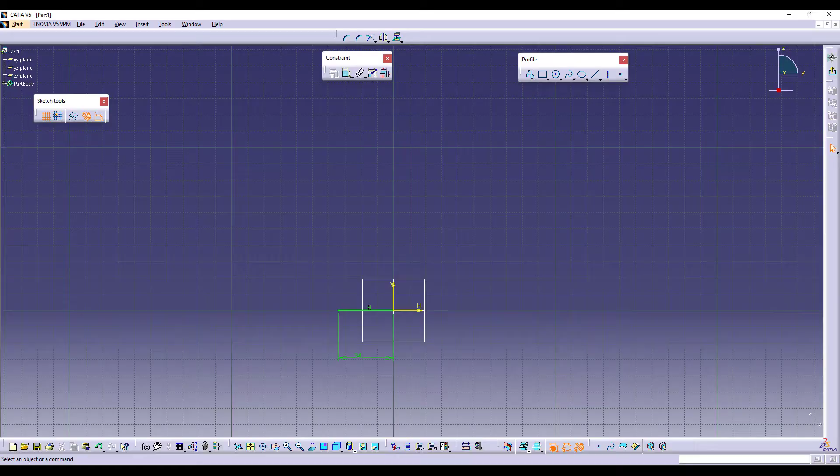As you can see, this is the first sketch, which is of 34. I'd like to make the sketch first and then start adding the material, which is an easier way of doing the clamp. So I'll take this as 34. Now I have a line as well, which is up to 25. And then goes this way and then goes that way. Now this is supposed to be 25.

This distance is 33, which is exactly from the center. I am understanding that this is the center for the axis. As you can see, I am taking this as my sketch because the dimensions are provided with respect to the centers. So I'd like to take this as 33. The overall height is 69. So let us maintain the 69 as well. You can do it directly or you can do it with me simultaneously.

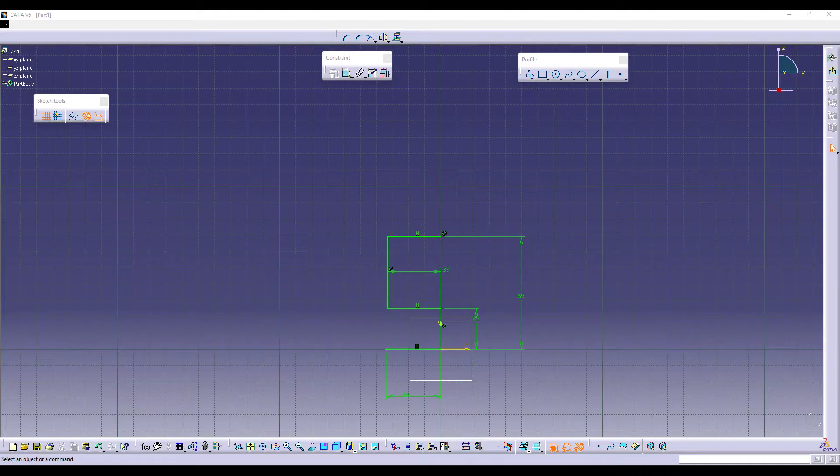Now again there is a straight line up to 44 and then another line. So let me take the straight line to 44 and then another line. The thicknesses for everything will be added according to the initial sketch. So this is supposed to be 84. No. This is a straight line at 84 as well and then goes up. This line is supposed to be 60.

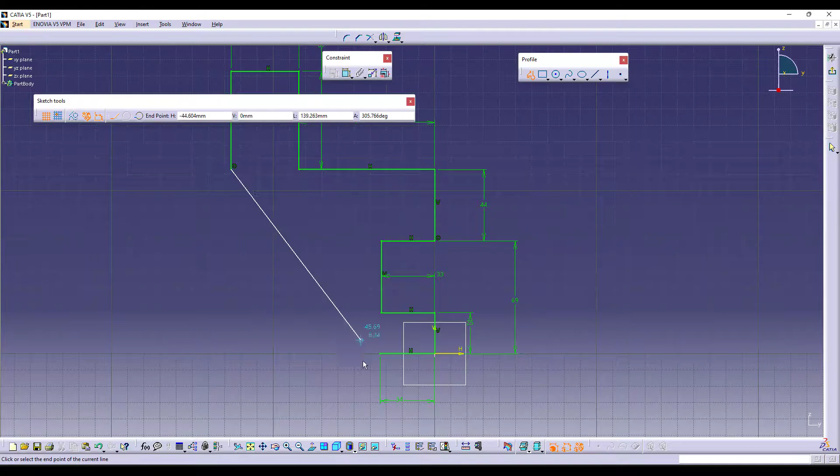The length is already given, so I am taking that as 60 and next is 42. So I'd like to take this particular line to 42 and then go back. This line and the 60 are the same as I've shown in the drawing, so hence I've coincided this with respect to this line. So let me give this distance, which is supposed to be 42, and then the slant line joins with the end part of your feature. This is your actual sketch.

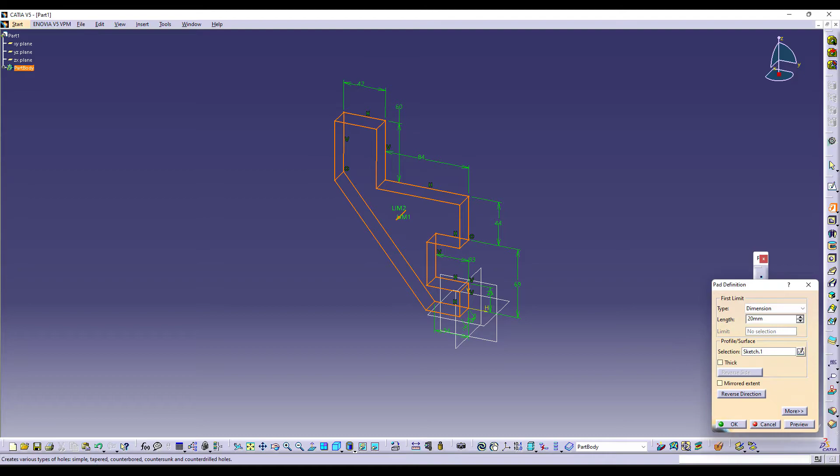Since we know that the thickness of the body is 6 typical, that is the whole body has a thickness of 6 only, let's take that as 6 first. Now let me use pad and do it. I'd like to do it symmetrically, which is mirrored extent on both the sides, because all my features depend on the center, the axes, as I've already mentioned. So I use mirrored extent. Since it's 6, I'll give it 3, so it adds material equally on both the sides.

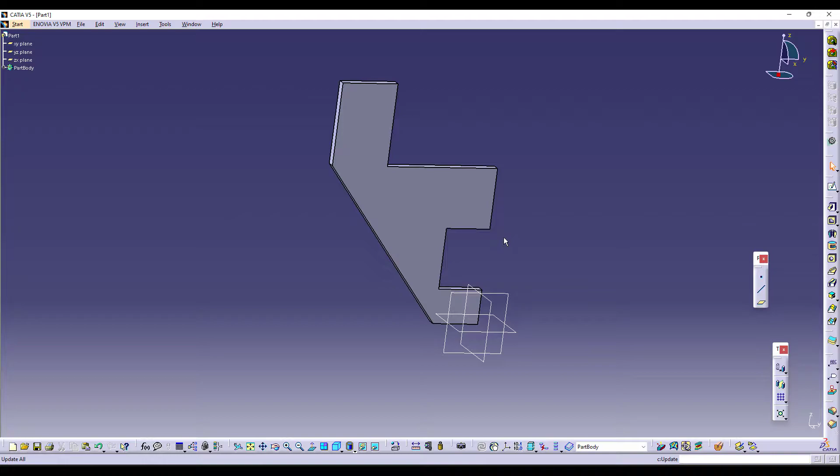Now, before proceeding to add the eye shape, let us start giving the rounds, because the rounds should be reflected to the external body as well. So let me take the rounds. This is supposed to be 27, which is the first round, and this is supposed to be 22, which is the next one.

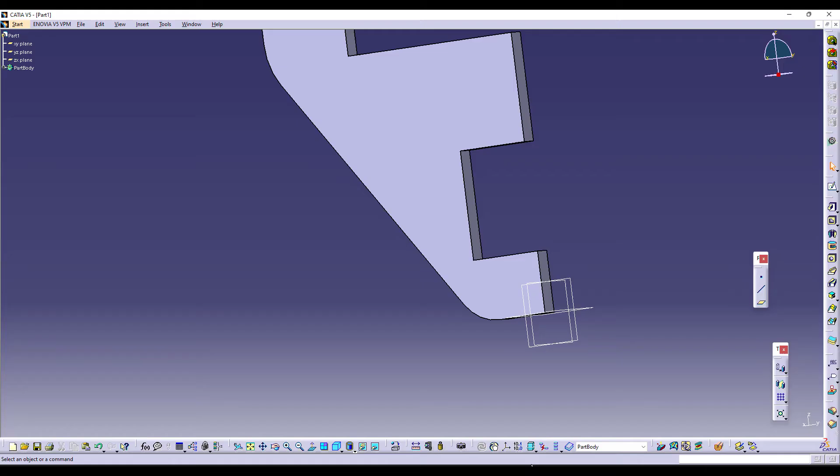And there are 3 more rounds. Let me give those as well, which is 13 and 12. So I'd like to give 13 first on this edge and on this edge, and then 12 to this particular edge. Then let me get back to the isometric view.

Now, the addition of material, as you can see, is non-uniform. This particular portion is actually up to 30, whereas this end portion is up to only 20. So let me do one after the other, and I'd like to use the front plane again because I want to do the addition symmetrically on either side. And I want to add this sketch, so I'll be using project. If you don't convert project into construction mode, it will understand that it's a sketch. So you can directly make that sketch and create an addition of material.

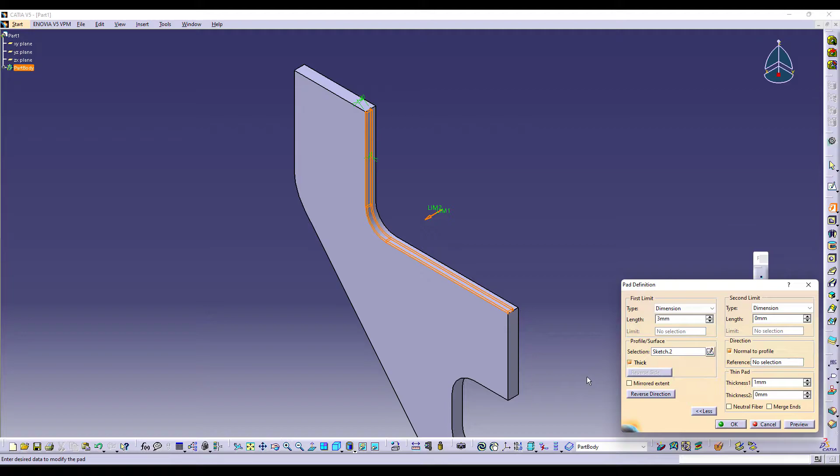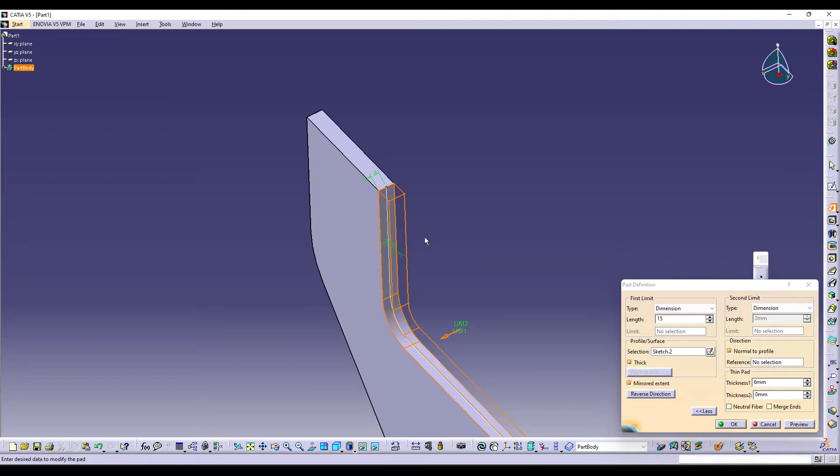Now you understand that since the sketch is open, it prompted us the error, so you can give thickness as well. The amount of thickness, as I have already mentioned, is supposed to be 6. So let us see if the thickness is adding on to the outer side or towards the inner side. As per the sketch, the addition should be on the outer side, so what we are doing is the right direction. We have to do it mirrored extent, and the overall addition is 30, that is 15. Whenever there is a mirrored extent in CATIA, you're supposed to give half of the length. It automatically doubles it.

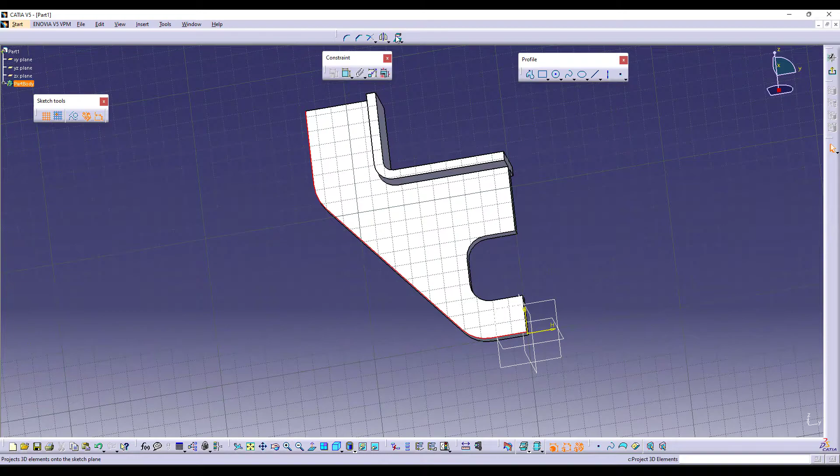Now, let's add to the rest. Again, I'm trying to use the front plane because I want to give mirrored extent, and then I'd like to use the whole sketch. This edge as well. Now, let me project that. As you can see, it converts itself into a sketch once you exit. You can create a pad. As usual, since it's open, it shows you an error.

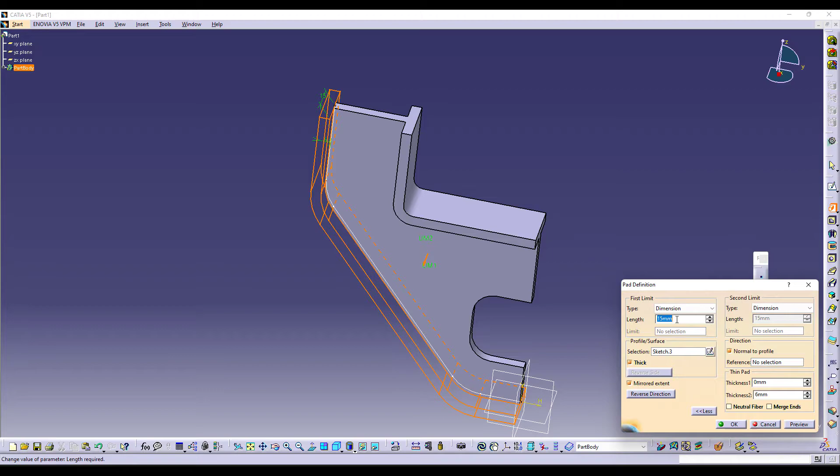Let us try to give thickness to it. The thickness should be added onto the other side. It should be added onto this side. So let's make sure that is happening. If it's not, you can again give the thickness over here. Give it onto the other side and say it's supposed to be 6. Now it's supposed to be mirrored extent, but only up to 20, that is 10. It does it equally onto the other sides up to 10.

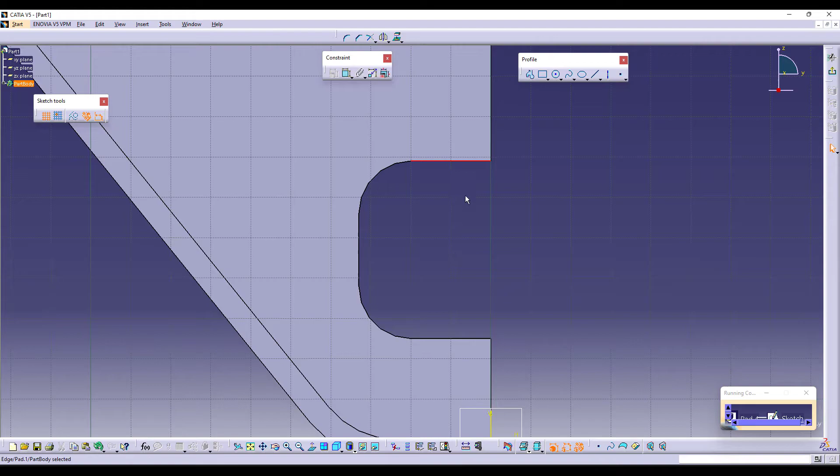Now the same is added to this, which is 20 TYP. So again, I'd like to take the same plane. The reason again I'm trying to take is because I want to do mirrored extent. In case you have missed previously, I'm trying to repeat it again. This is the center. Again, it will show you the error. You have to convert that into a solid.

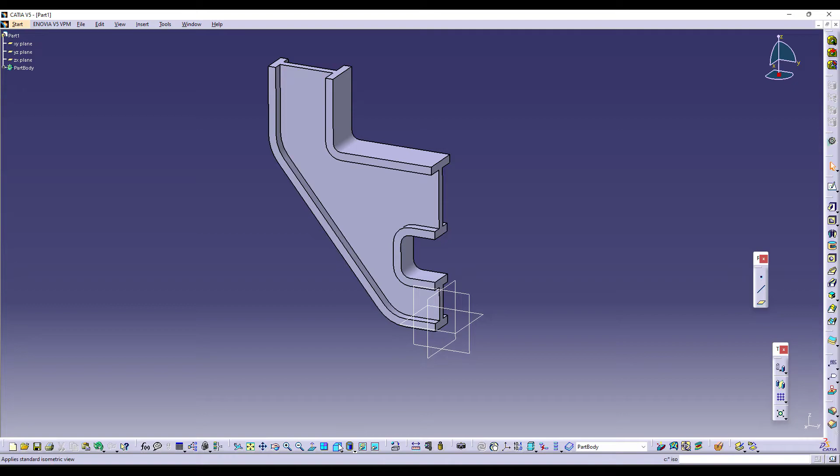Now make sure that the thickness is towards the inner side. So this is supposed to be 6 and this is supposed to be 0. And the dimension is 10, which is perfect onto both the sides. Once I say OK, it tends to create this way. Now when you add material, usually the body becomes 1. So you can follow that process as well.

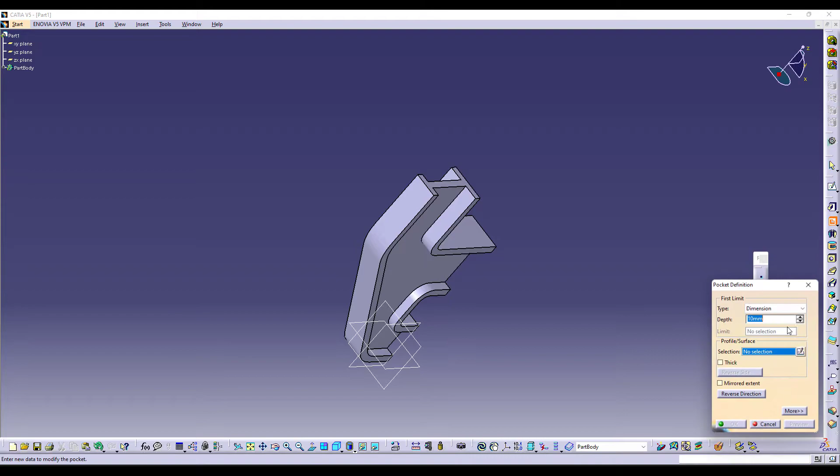Now let us add these circles. Usually to add these circles, we need to remove the material first. So I'd remove the material and then try to add it. The overall dimension for this is dia 34. So I'll use this face. And now try to remove the material. We know where the differences are. Let me take it here, and the diameter is given as 34. This is supposed to be exactly at the center. So let me try to coincide it on the center.

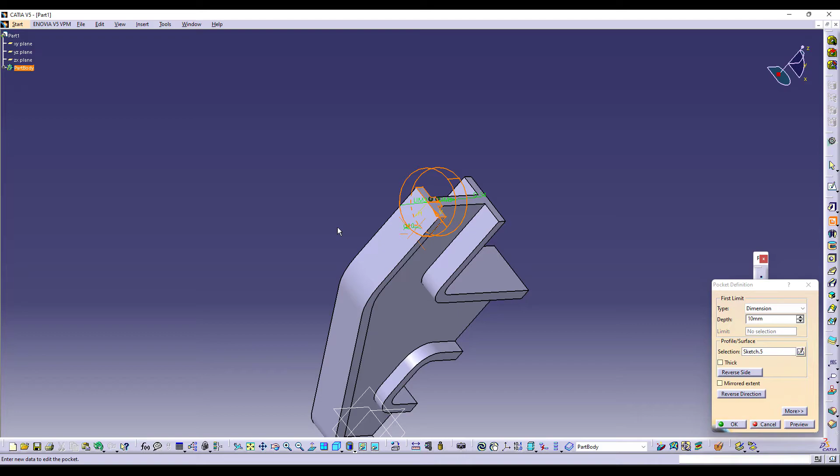Now exit. We need to cut this material till the immediate next surface, so I'd like to cut it. Now again I can add the material. Here we cannot add the material inside the body. A body inside a body cannot be done as per feature based modeling. Hence we do it this way. In CATIA usually it becomes one single body by using a union command. If you want, you can try that as well.

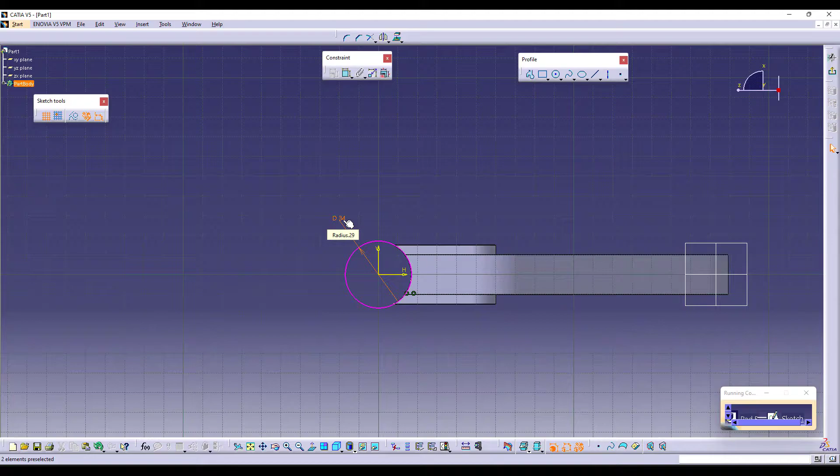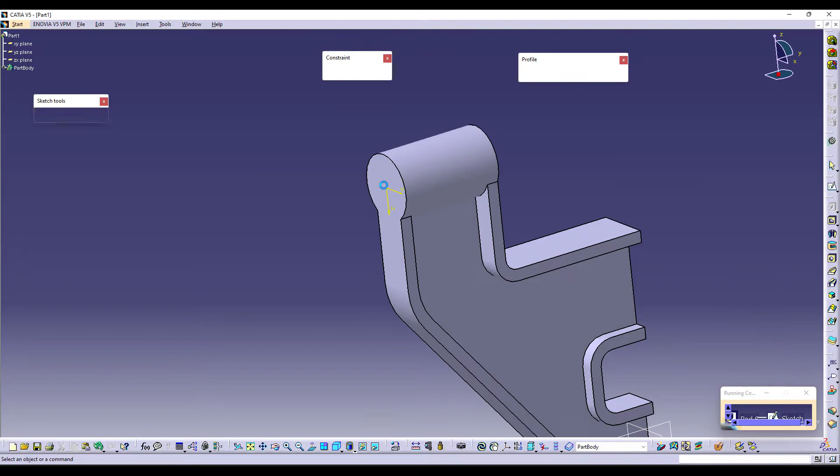Now since I am using that as the reference, the diameter is the same. So let me try to add the material till where I want to and then say okay, this is the addition of material. Now there are 2 more circles, which are of 8 TYP and 42 dia. So let's try to take that as well onto the same body using the same axis. I'd like to use the same axis. So I'm trying to keep this,

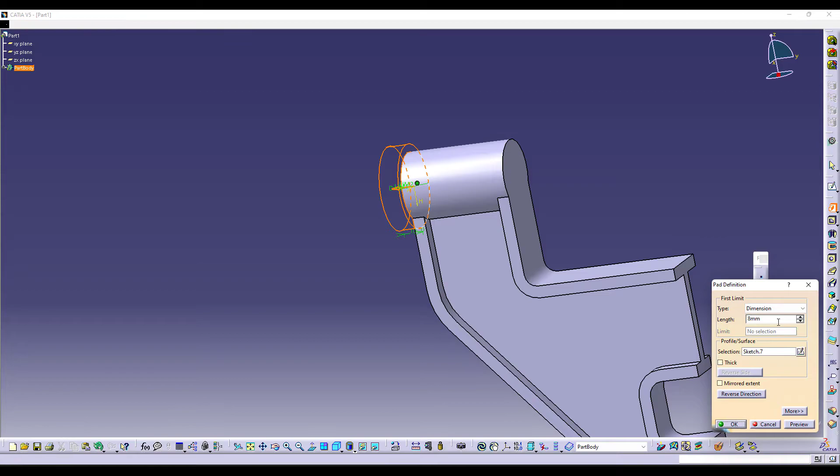and he said 42. So I'd like to take this as 42 and then maintain concentricity. It's an easier way of doing it. Whichever you're comfortable with, you can use. And then add that material. Since we already know it is supposed to be 8 typical, I'll add it that way. Now the same thing should be done on this side as well.

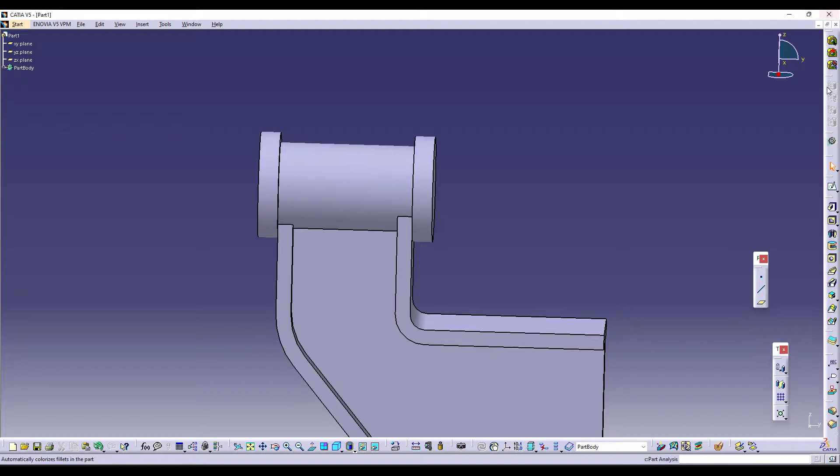You can take a plane in the center and mirror, or you can do like how I am doing right now. You can just select the complete edge and then add the material using your project command. It works the same. Now they are dependent on each other. So if I change this dimension, even this circle auto updates itself. Okay, now let's see how the bodies unite and become one by directly adding the material onto the body.

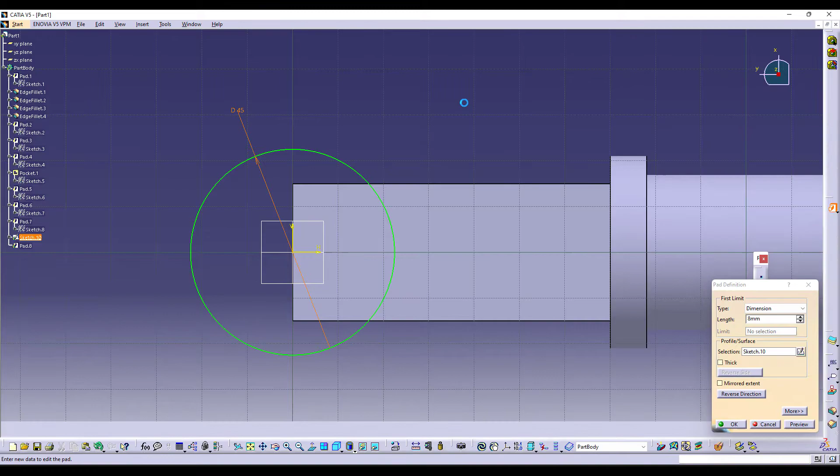So I know the dimension for this center is supposed to be 45, which we have already seen here. So let me try to take that and exit. Now when I add the material, I need to add it till this extent. One direction is actually till 1. They have mentioned that in the drawing. As you can see, a small 1 is here. And the other side is supposed to be up till the selected surface, till where I select it to be.

Once you do that, it converts itself into one single body. A body inside a body is usually not acceptable, but in CATIA it becomes one, or you can use a simple union command if you think it is not one single body. Now let us add the last one, which is of R10 from the bottom. I'd like to take this face as well and start making my sketch.

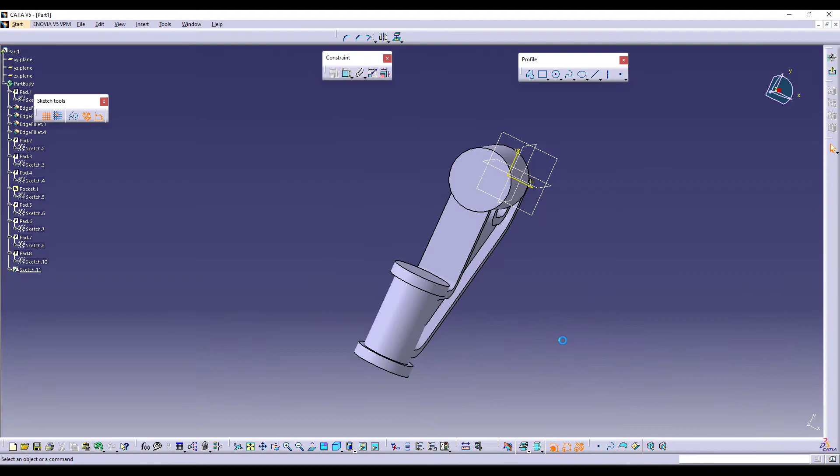It has the same center. It's supposed to be of radius 10. So I'd like to convert this to radius and give it as 10, then add the material. While adding the material, it should go up to the next surface, so I'd like to do it till here. As you can see, it does it.

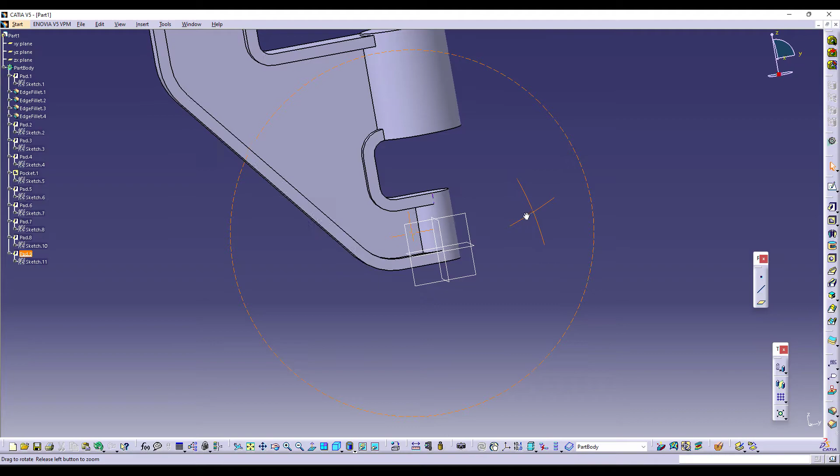This is how you add material. You can do both ways - you can either cut the material in air or you can do it this way as well. So let's continue with the model.

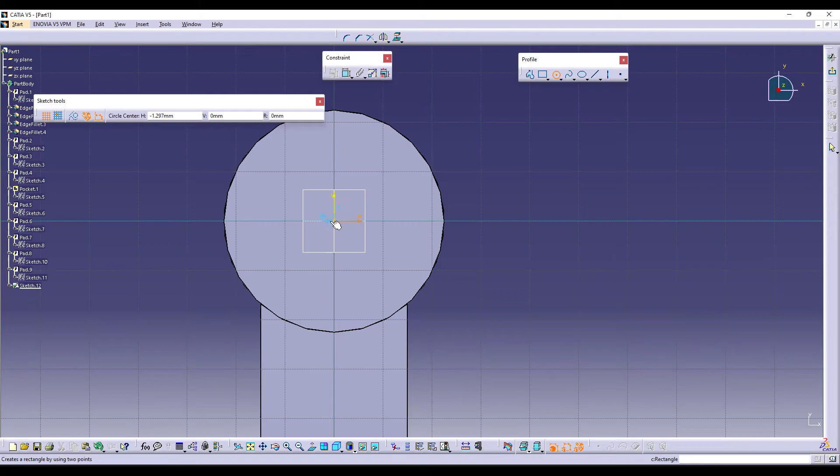There is an addition of material here which is a 54 dia, and since 8 typical is given, the thickness for that is 8 as well. So let me try to make that, considering this as 0,0 again. This is supposed to be 54. Now add to 8.

There is this feature which we are supposed to add, which is at a distance of 37 as well, and the height from this base is at 35. So let me try to take a plane first at 35 and then start making that feature. Into the other direction I want it to be at 35. On this plane I'd like to make a sketch.

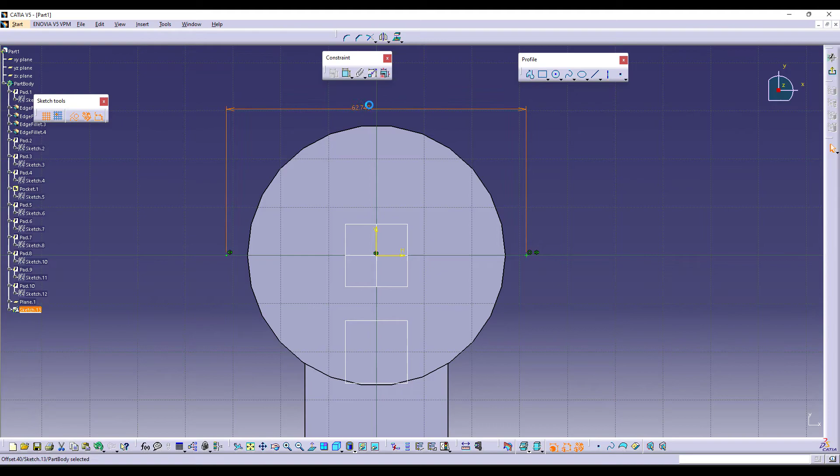Now the sketch is actually supposed to be of a point. I'll mirror it onto the other side and keep this in construction mode. Now the distance between these two is supposed to be 37. I want to maintain the 37 distance, hence I am trying to give it in this way. You can directly take 37, take a plane at 37 by 2 and also do it, but if you want to maintain proper dimensions, this is the way you can maintain the modeling.

Now I'm taking it parallel. I want it parallel through a point. I've selected my point and selecting the reference. You'll get the plane at that location.

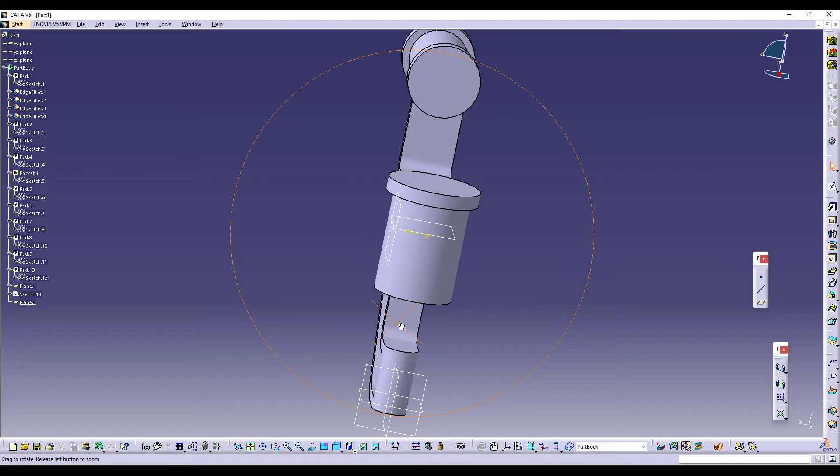Now on this plane, let us try to add whatever the sketch is given to us. This is my reference again, I can use this as my reference if I want. Now the sketch is actually at a distance of 28 and 10 radii.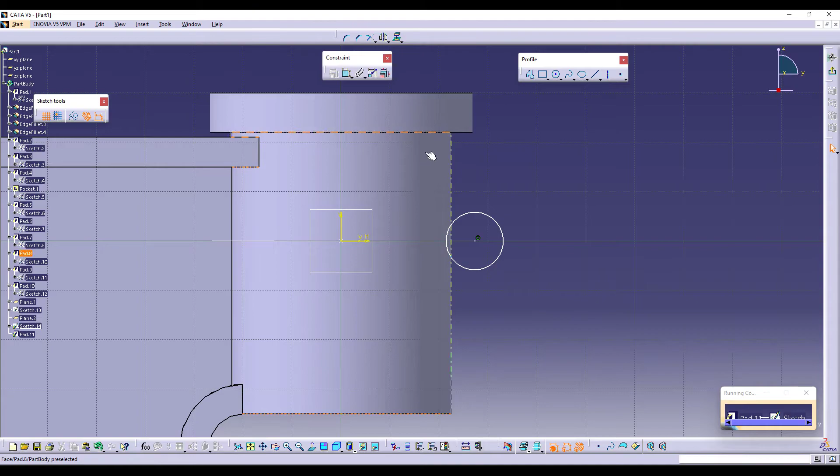So let me take that. This is a distance over here, this is supposed to be of 10 radii. And the distance is supposed to be 28. Now let us take the lines as well and then close it, and try to maintain tangencies as well.

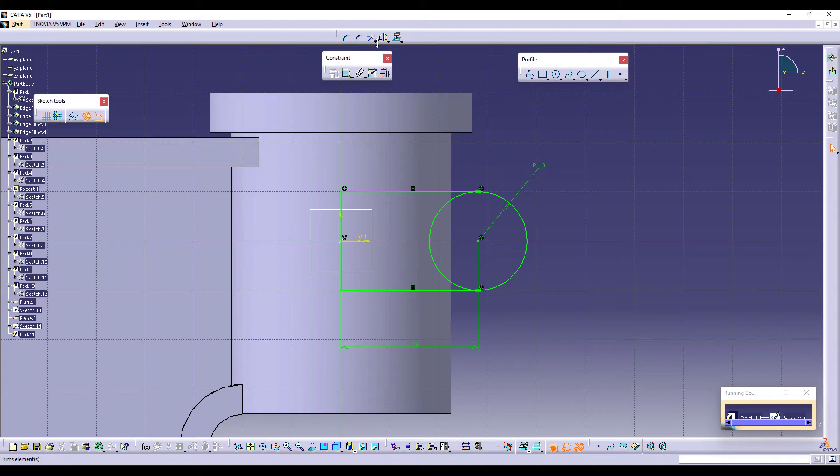And trim off whatever is not needed and add material. This particular body is actually added up to 16, onto the other side. You can mirror this feature.

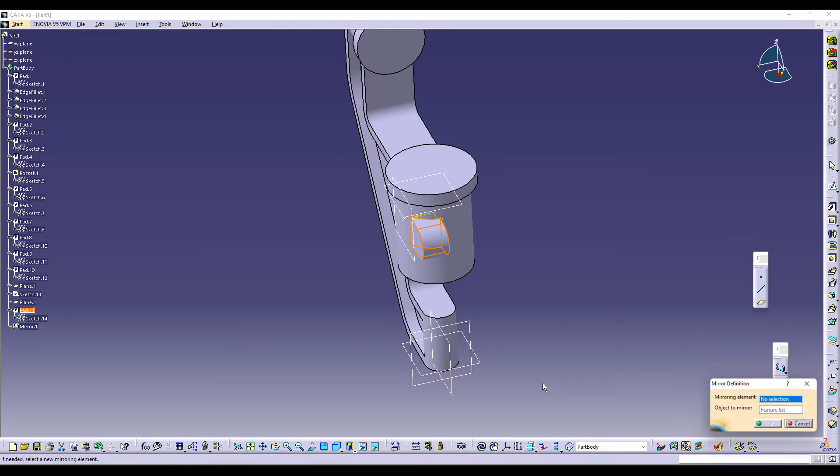Now, after the mirror, the final operations which are left to us are the rounds as well as our holes. So let us try to give them. I'd like to give this hole first, which is M10 through, using CATIA. I'm using a simple hole command, selecting the face, positioning it, and giving concentricity.

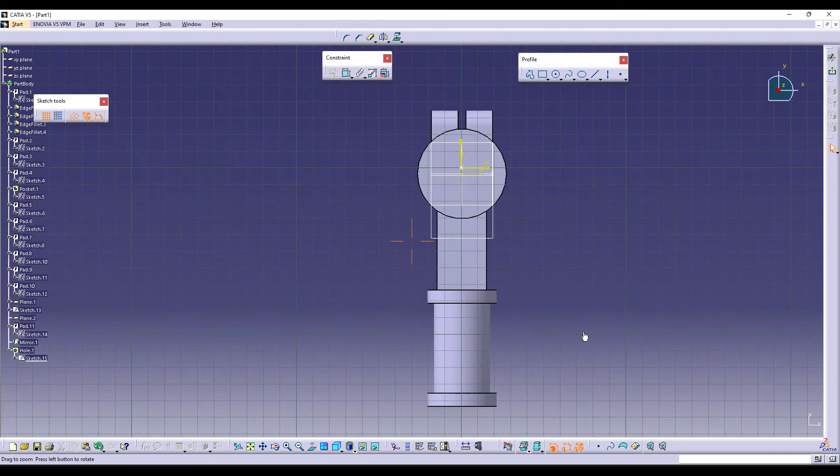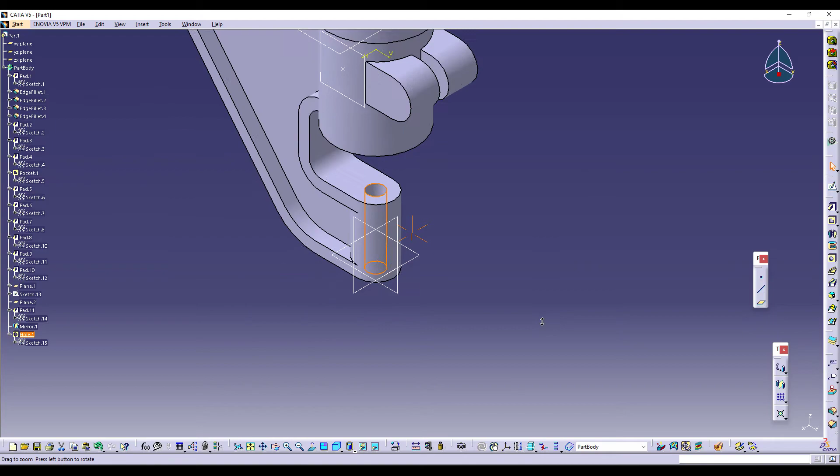Now let us try to change this - the first one. The 10 through is the second hole.

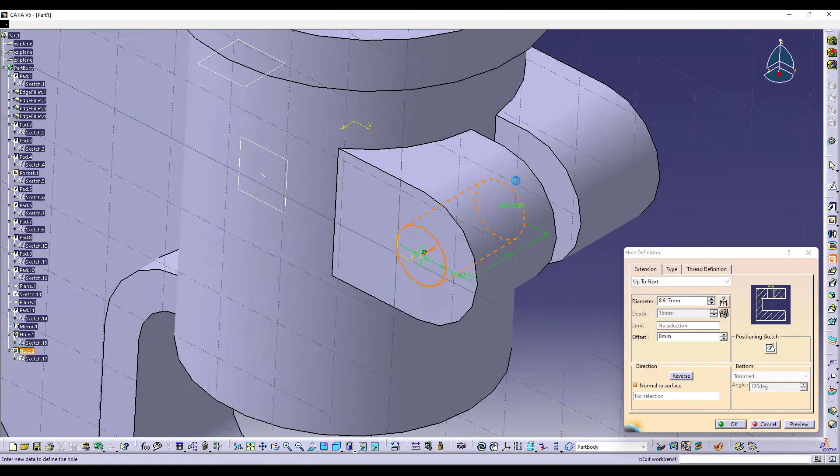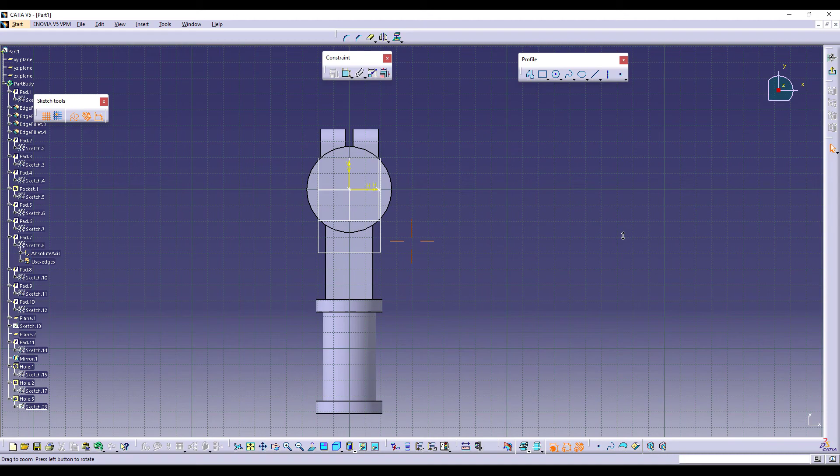Now the next hole is given at this location. Let's try to take that, which is 35 through. So I'd like to use the hole command again. This is supposed to be 35 up to the next, and I'd like to maintain concentricity. It's a very good practice to maintain concentricity.

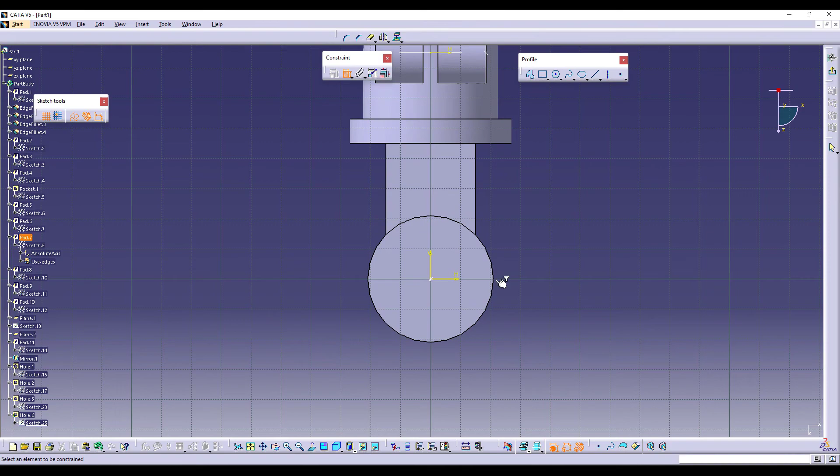Now there is another one as well over here, which is of 24. So let's try to give that as well. This is it.

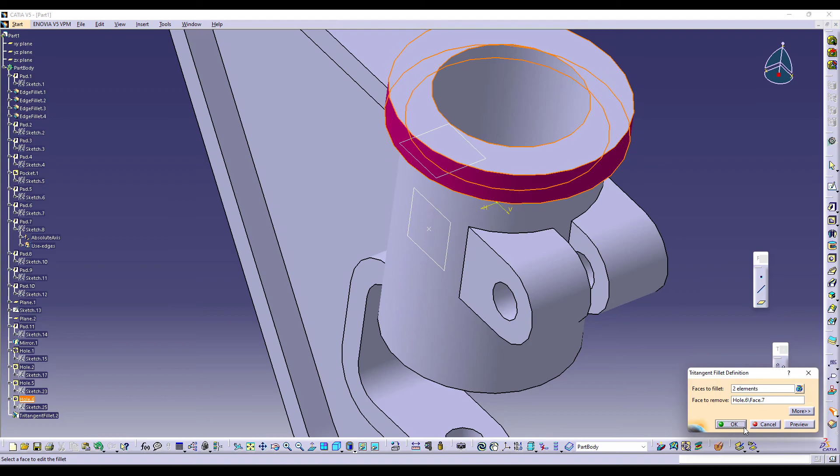Now there are few rounds, so let's try to give those. There is a tritangent round actually, in between this feature and the face. Let's try to create that round. As you can see, the same thing applies to these two sides as well.

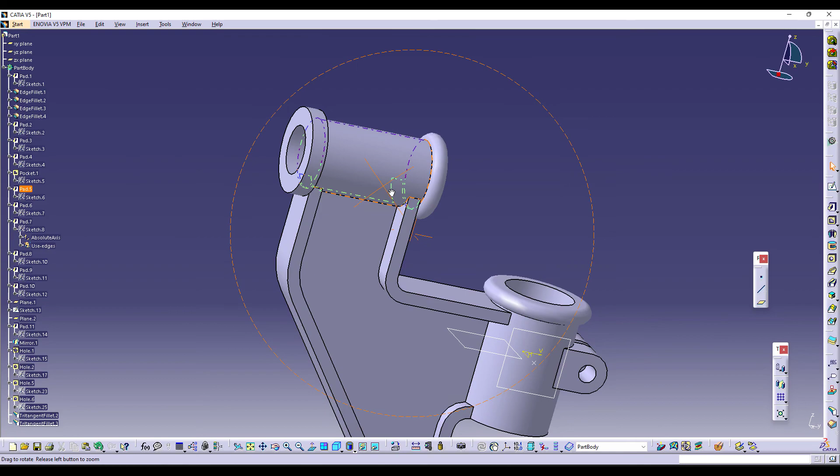If the tritangent fillet does not work for you, take at least 1 mm additional material over here, so it tries to give it in a better manner. If you are facing an issue, usually you should not, but if you are, you can do this as well, or you can directly take 1 mm additional material just to be on a safer side and give your full rounds as well.

This is the rounds. This is how you make a clamp using CATIA.